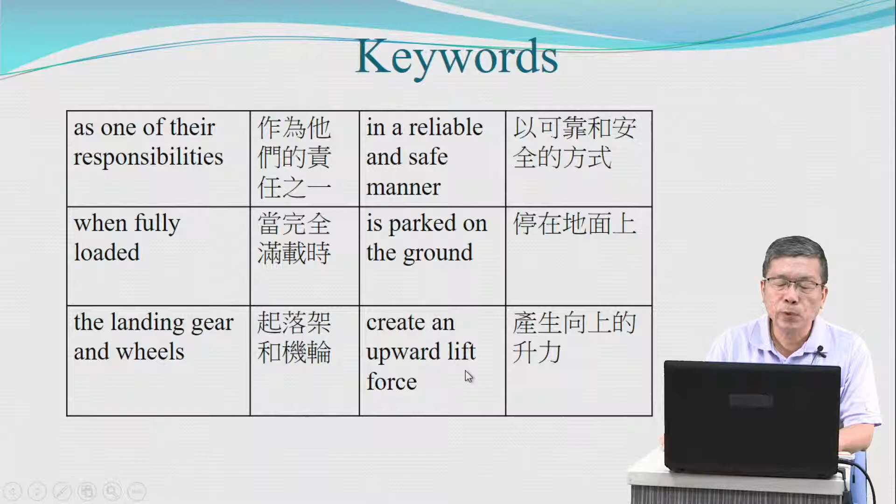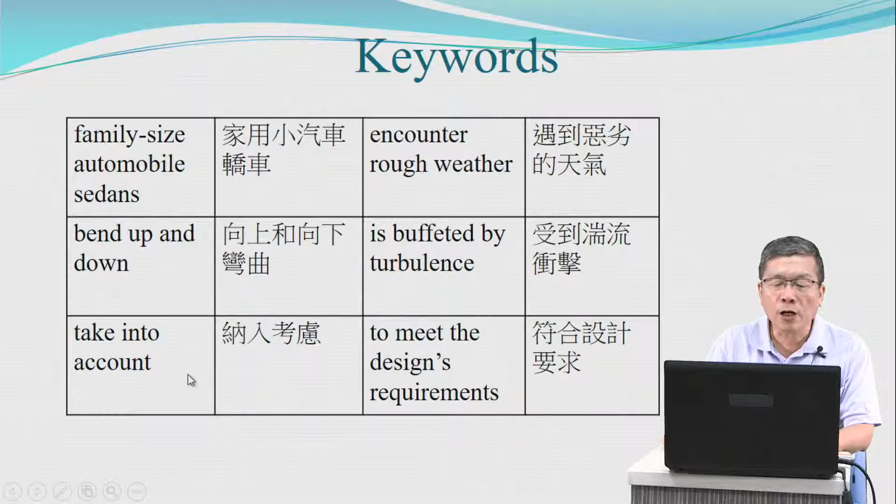Family-sized automobile sedans encounter rough weather, bend up and down, is buffeted by turbulence. Take into account to meet the design's requirements.

Element 4, Materials and Stresses. By applying the properties of force systems, mechanical engineers have seen how to calculate the magnitude and direction of forces that act on certain structures and machines. Knowing those forces alone, however, is not enough information for an engineer to decide whether a certain piece of hardware will be strong enough and not fail in the task at hand.

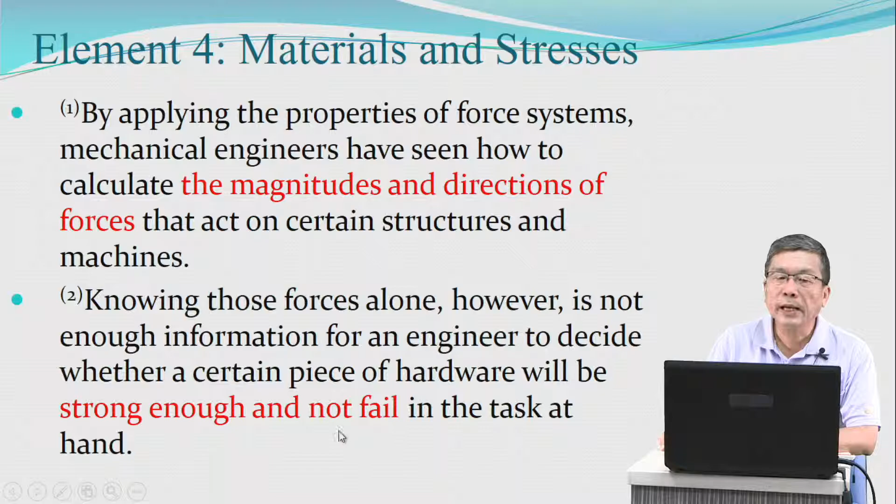By fail or failure, we not only mean that the hardware will not break, but also that it will not stretch and or bend so much as to become significantly distorted. A mechanical component to break, stretch, or bend depends not only on the forces that are applied to it, but also on its dimensions and the properties of the material from which it is made.

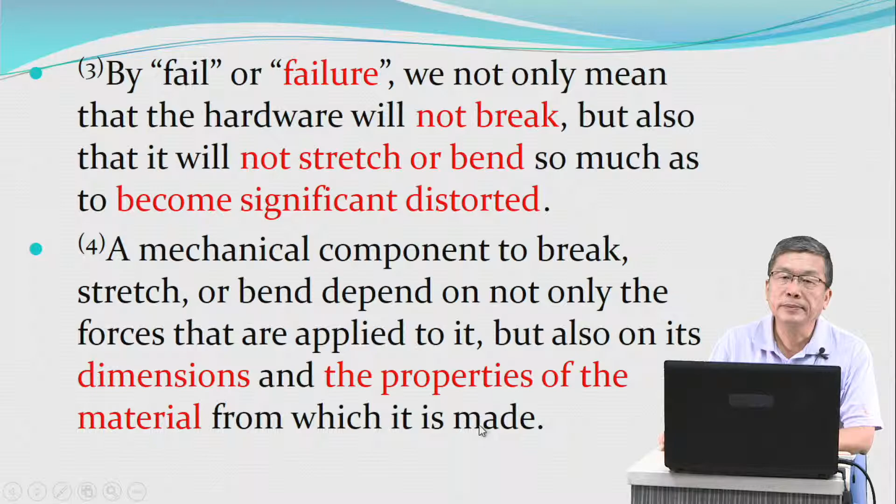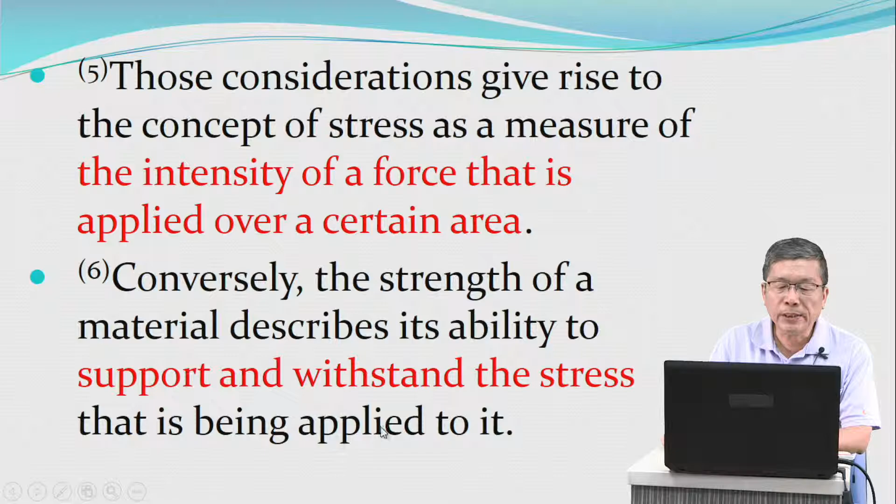Those considerations give rise to the concept of stress as a measure of the intensity of a force that is applied over a certain area. Conversely, the strength of a material describes its ability to support and withstand the stress that is being applied to it. Engineers compare the stress that is present in a component to the strength of the material in order to decide if the design is satisfactory.

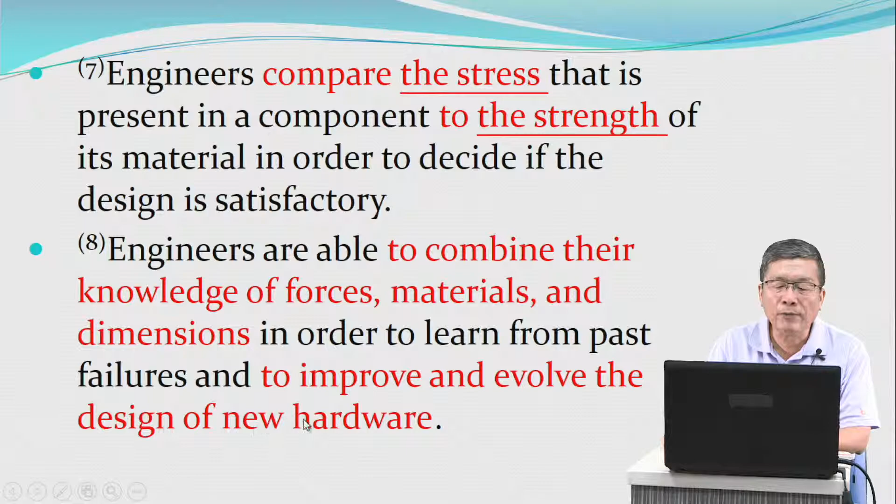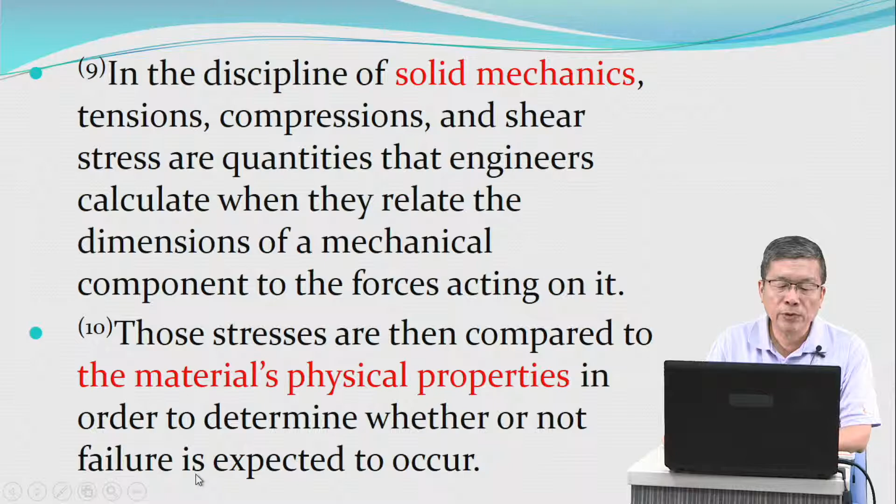Engineers are able to combine their knowledge of force, materials, and dimension in order to learn from past failure and to improve and evolve the design of new hardware. In the discipline of solid mechanics, tension, compression, and shear stress are quantities that engineers calculate when they relate the dimensions of mechanical components to the force acting on them. Those stresses are then compared to the material's physical properties in order to determine whether or not failure is expected to occur.

When the strength exceeds the stress that is present, we expect that the structure or machine component will be able to carry the forces without damage occurring. Engineers conduct this type of forces, stress, materials, and failure analysis while they design products.

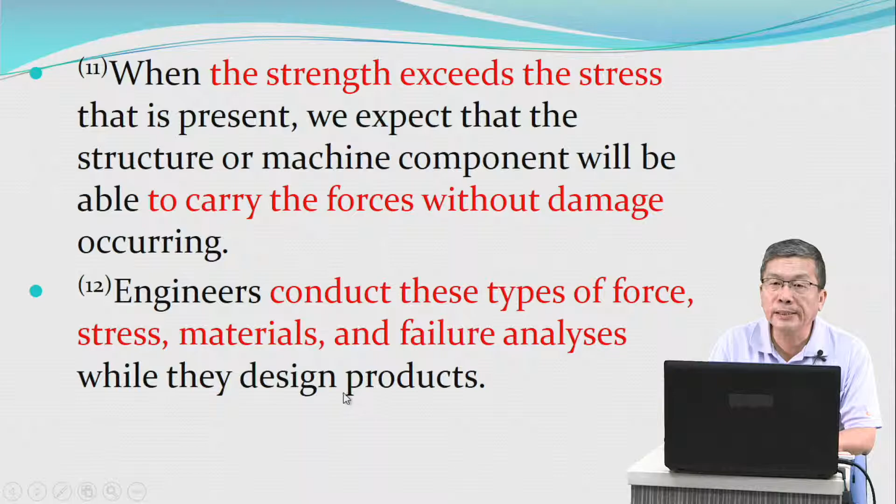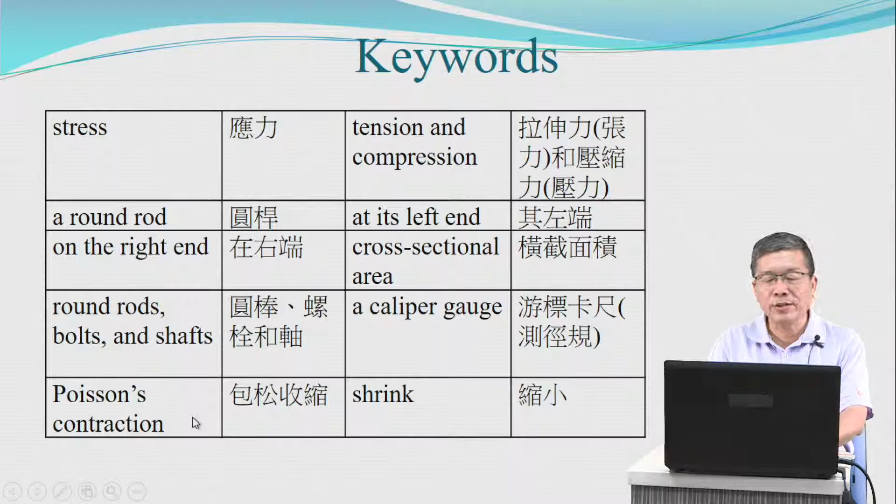Poisson contraction. The keywords: stress, tension and compression, a round rod at its left end, on right end, cross-section area, round rods, bolts and shafts, a caliper gauge, Poisson's contraction, shrink.

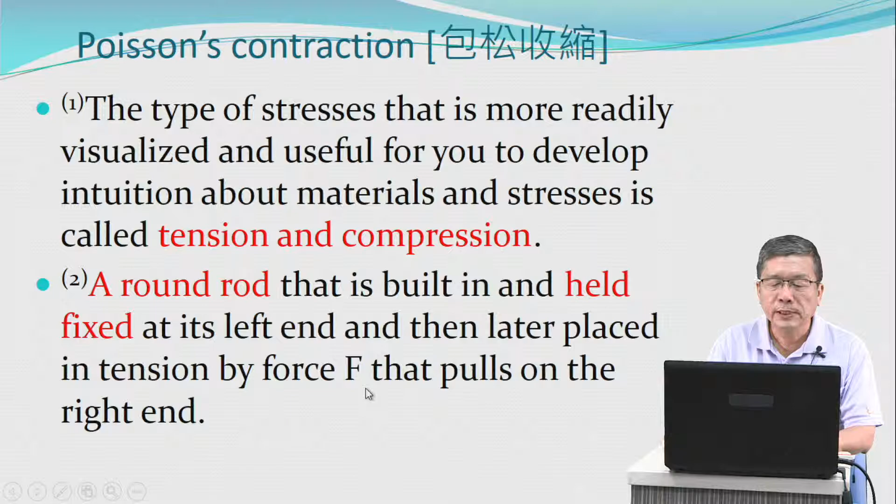The type of stress that is more readily visualized and useful for you to develop intuition about materials and stresses is called tension and compression. A round rod is built in and held fixed at its left end, and then loaded in tension by force F that pulls on the right end. Before the force is applied, the rod has original length L, diameter D, and a cross-sectional area A.

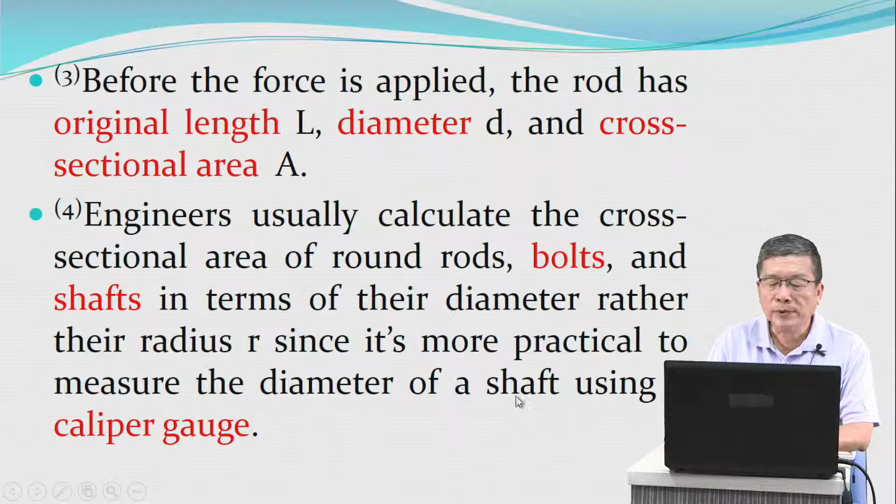Engineers usually calculate the cross-sectional area of round rods, bolts, and shafts in terms of their diameter rather than their radius R, since it's more practical to measure the diameter of a shaft using caliper gauges. As the force F is gradually applied, the rod stretches along its length by the amount delta L.

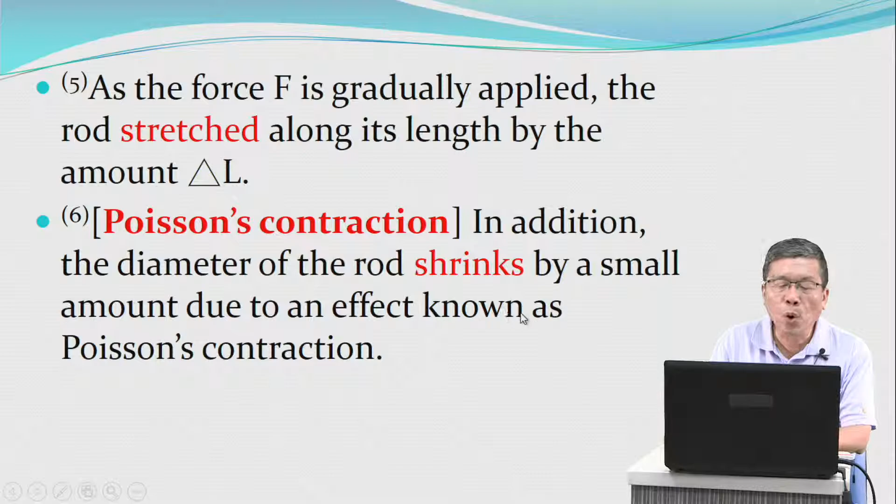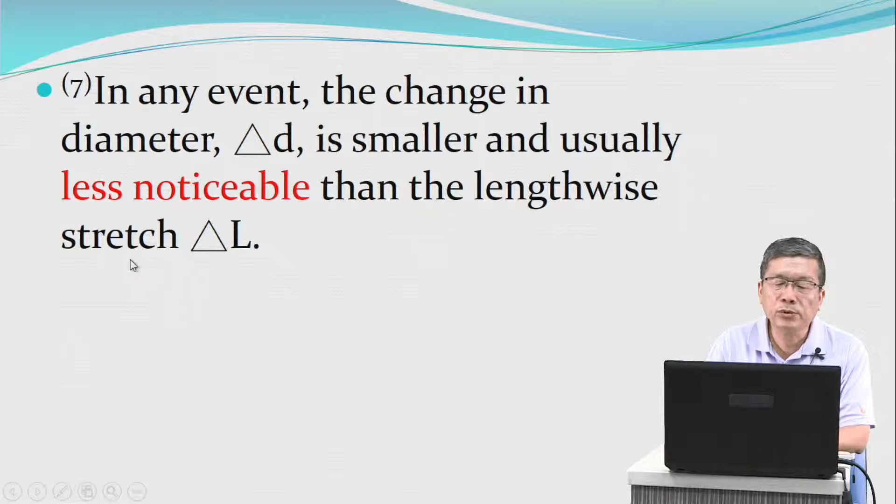Poisson's contraction. In addition, the diameter of the rod shrinks by a small amount due to an effect known as Poisson's contraction. In any event, the change in diameter, delta D, is smaller and usually less noticeable than the lengthwise stretch, delta L.